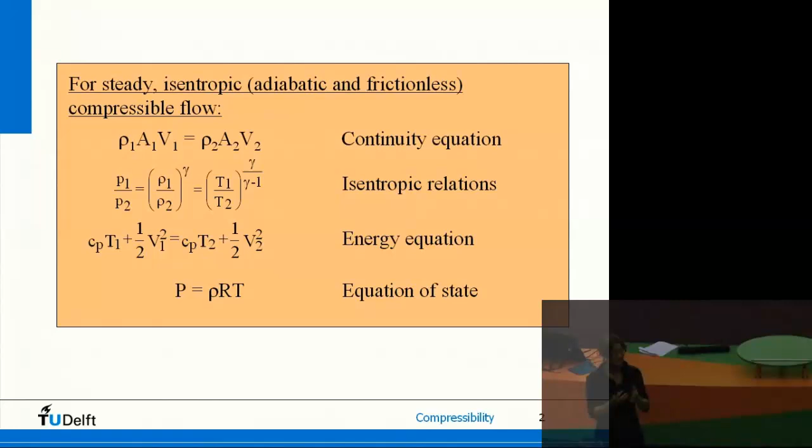If your flow is fast - supersonic, transonic - you have pressure and density changes such that the temperature does change in your flow, through P equals rho RT. It can expand very much, so density can drop a lot, and something will happen to the temperature as well. So bear in mind, isentropic flow means no heat is added or subtracted, but the temperature can still change. The other requirement is that it should be reversible, so dissipative effects can be neglected.

Then we derived these equations. We already had conservation of mass, the continuity equation. Then last time I derived the isentropic relations, which are strong relations relating the scalar quantities - pressure, density, and temperature ratios - to each other. Once you have knowledge about the state at point 1, and you know one other quantity at another location, point 2, you can derive the rest. These are the isentropic flow relations.

For isentropic flow, we could also derive the energy equation, starting from the first law of thermodynamics and using the Euler equation. This is the equivalent of Bernoulli. Velocities scale with enthalpy - velocity squared, changes in velocity squared, scale with Cp times T, and that is enthalpy. This is conserved throughout the streamline: Cp*T plus a half V squared is constant. That's energy conservation. We already had introduced, in the first lecture, the equation of state, P equals rho RT.

So we have here the unknowns P, rho, T, and V - four unknowns and four equations. So if you know, for example, the areas, you can solve for anything. And that's where we ended up.

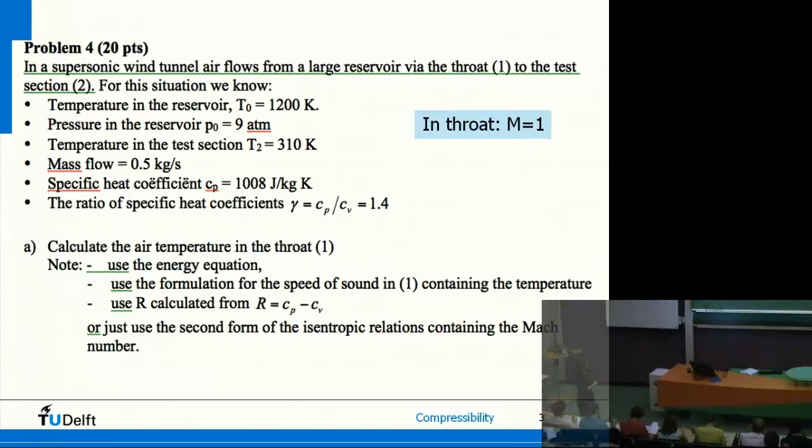This is a picture of the case: we have a very large reservoir up here, and flow is going out into the throat. I also got a question - how can the speed be 0 in this large reservoir? Well, you can assume it to be really huge, with the throat very small in comparison. In some bit of the reservoir, flow will flow out, but the very large bulk doesn't really notice, so you can approximately assume the speed to be 0 inside the large reservoir.

It goes through the throat, a converging nozzle, then diverging into a test section. Now if conditions are such that you get really supersonic flow - and it's called a supersonic wind tunnel if conditions are right - this depends among other things on the contraction ratio, but also on the pressure downstream. Please note the pressure in the reservoir was 9 atmospheres, so it's really pushed out.

If it's supersonic, then at the smallest cross-section, called the throat, the Mach number will be equal to 1. The Mach number is speed divided by the speed of sound, so here the flow will exactly have the speed of sound. That has to do with something we will explain next year in compressible aerodynamics.

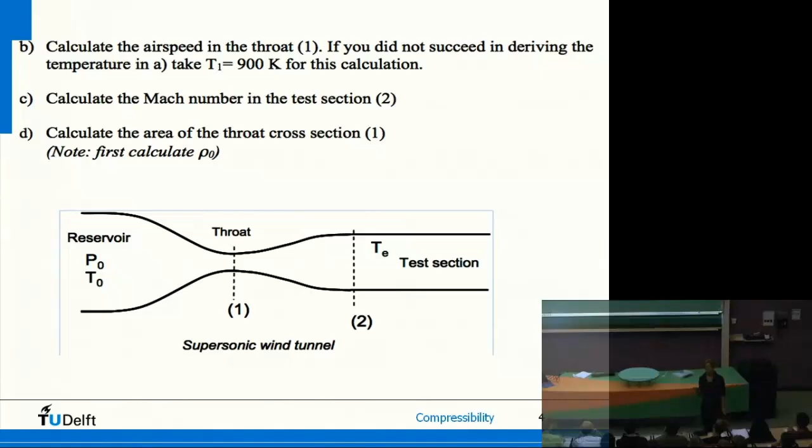If you are more used to partial differential equations, you can see that inside the PDE, that is sort of contained, a physical fact. So M is equal to 1 here. The speed of sound, square root of gamma RT, depends on temperature, so it can change throughout the flow. We always use 340 meters per second, but that's the speed of sound at standard sea level air conditions. In oil it is different, and if you give the air a speed, the speed of sound changes too. So please be aware that you always have to compute that.

Mach is 1 here, sonic flow. In a supersonic wind tunnel, if you increase the area, the flow speed will increase and you get supersonic flow at the test section. So we're halfway, I think. We just calculated the airspeed as well, and I think we're now at point C. So I will give the answers we derived last time.

So, the temperature in the test - in the throat, I think. What was the first question? Temperature in the throat. So for A, T star was 1000 Kelvin. For B, the speed in the throat, actually equal to the speed of sound in the throat by definition, was equal to 640 meters per second.

Now let's continue with question C. The question is, calculate the Mach number in the test section. Mach number, any ideas how we can? Yes, so step 1, what is the Mach number? Speed divided by the speed of sound. So Mach number in the test section is V test over A test. Now, was there any information that we can use?

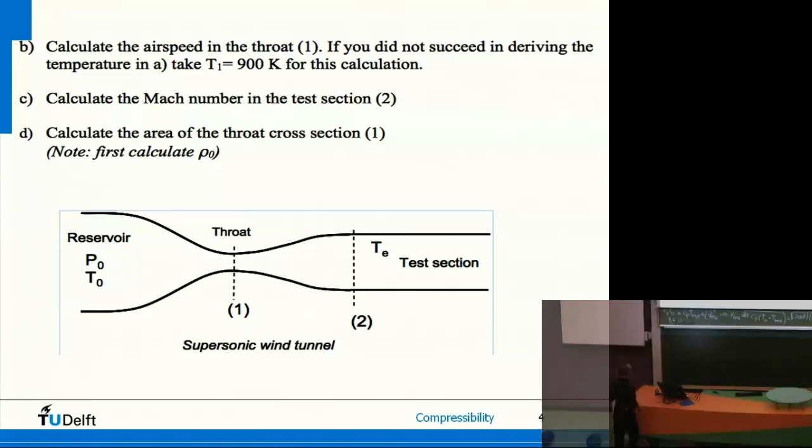The area of the throat of the cross section. Any ideas? Maybe I should... Rho AV, we can use that one. And what is it equal to? To rho AV, mass flow, perfect. So indeed, rho AV is constant. Good point, because this is the only equation we have the area in, so good starting point.

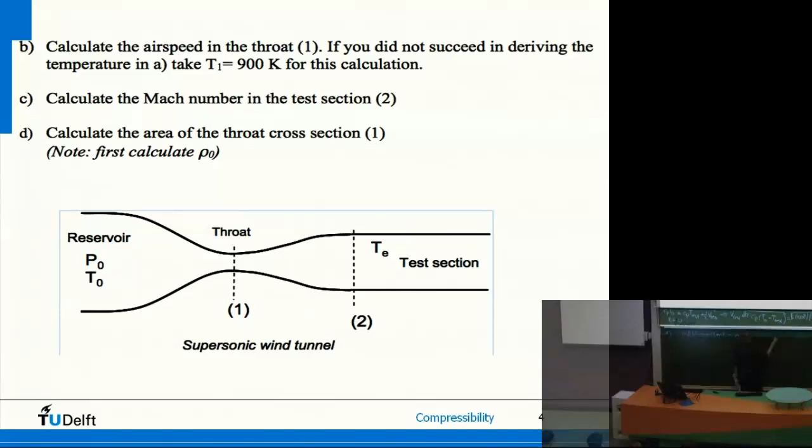So this is constant. And what is it equal to? It's equal to the mass flow. And you can check it, because if you're interested in what is it, so we have rho, kilograms per meters to the third, area, meters squared, v, speed, meters per second. So what is the dimension of this? It's kilograms per second. So how much kilograms of air go through this area per second? Right? So it's the mass flow.

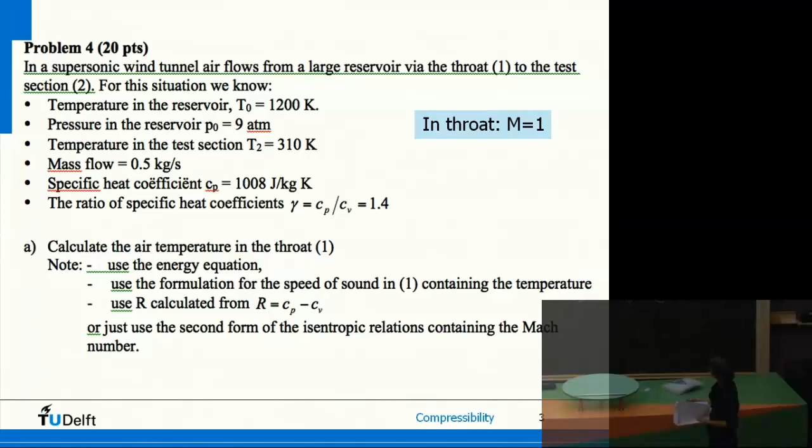Do we have information about the mass flow? Excellent, 0.5. So indeed, we can solve this question now, because we have 0.5. Where do we have 0.5? Everywhere, it's constant. Okay.

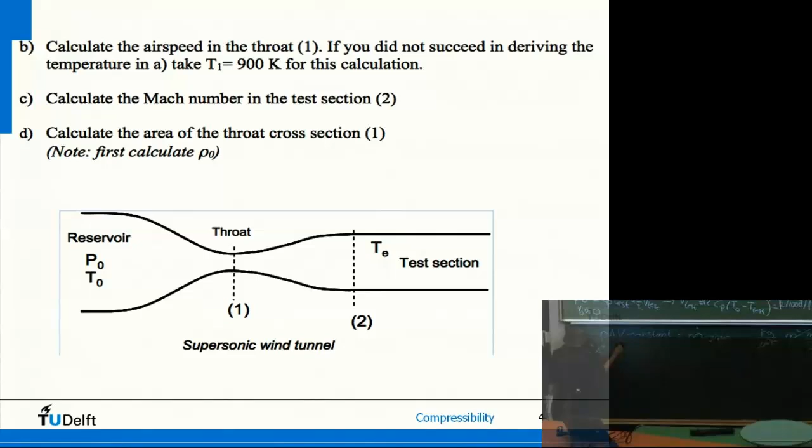Area of the throat in the cross-section. Well, then, of course, this one is given. Speed is 0. Whoa, wait a minute. So we have to apply this in the throat, right? To find the area of the throat. Then somebody said speed is 0. Wait a minute, I'll get back to that.

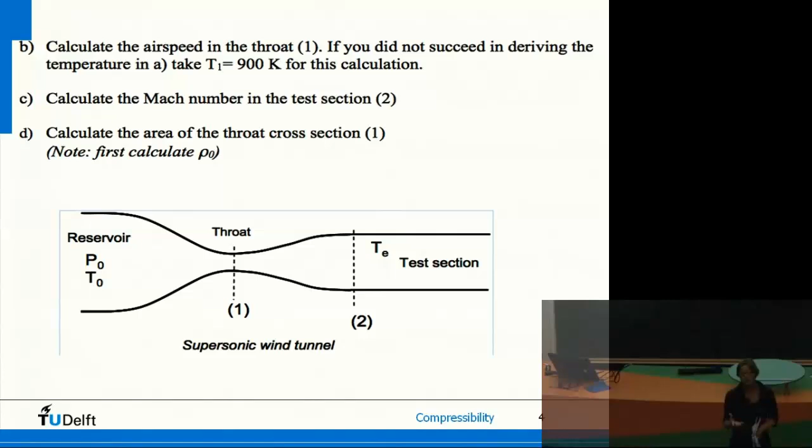So yes, you might get the idea that the speed is 0, because of course in the reservoir the speed is 0. We just assumed. So if you apply it there, we have no mass flow. What is happening there? Well, we have an infinite area in a way. So infinite times 0, what is it? It depends a bit on how it goes to 0. So that is not something that brings you much further.

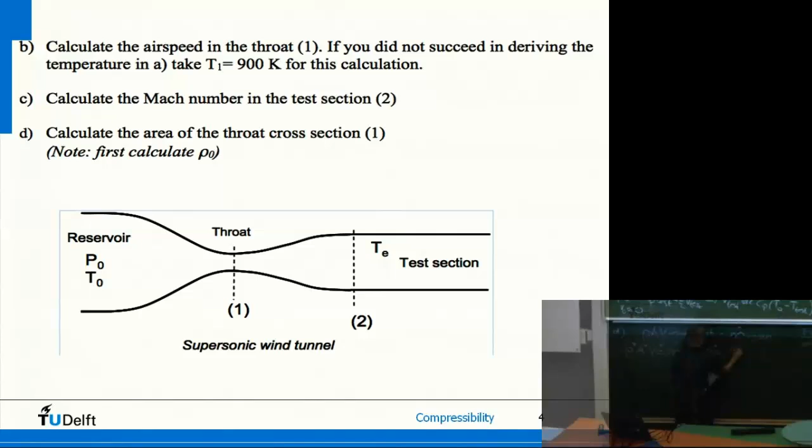So mass flow equals rho star, A star, V star. We're looking for A star, so that's going to be the area of the throat. It is then mass flow divided by density in the throat times speed in the throat. Do we have the density in the throat, and do we have the speed in the throat? Speed, yes, right? I think we computed it here.

So that one we have from B. So V star, from part B, V star was 640 meters per second. So if there's any way to compute rho star, we're done.

Isentropic relations, perfect. Because isentropic relations relate ratios of something to ratios. So what would you apply it to? So of course on one side density, right? So the isentropic relations for density, rho 1 over rho 2 is equal to, and what would we choose? Which form, pressures or temperatures? Temperatures, perfect, because we have more information on temperatures actually. So T1 over T2 to the power 1 over gamma minus 1.

Now we have to choose point 1 and point 2. So where are we going to take it from? So this is the general form of the isentropic flow relations. We're looking for something in the throat, so it probably makes sense to choose one of them in the throat, right? So let's do this one in the throat. And the other one? 0, yes, reservoir.

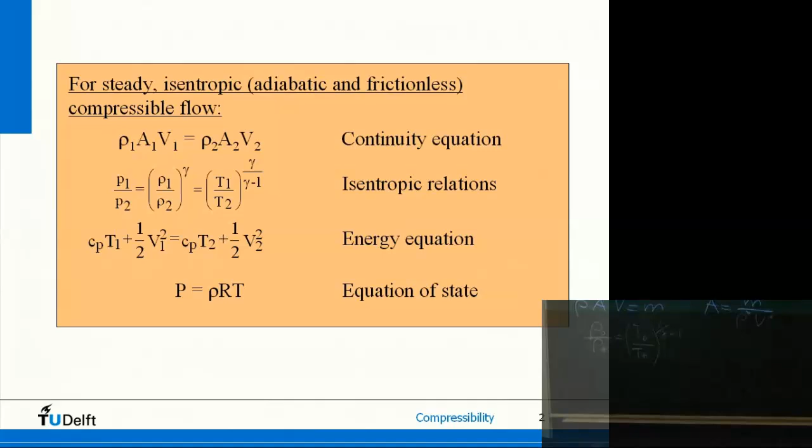Why do we choose the other one in the reservoir? No, this is fine, the gamma is with the pressures. Sorry, rho, I made a step. So rho over rho 2 to the power gamma. So the isentropic relations, rho 1 over rho 2 to the power gamma is equal to T1 over T2 to the power gamma over gamma minus 1. What I did is I took the gamma square root of this. If I had taken the pressure, of course it's true, but I'm looking for density versus temperature. Okay, why reservoir?

We have also temperatures in the throat, right? We need pressure, because for rho 0, it's not enough to have temperatures. We use the equation of state, and we need pressure, and that's the only location where we know the pressure. Indeed, so rho 0 from the equation of state, so P0 over R T0.

So let's do that first. Then rho 0 is equal to the pressure, 9 atmosphere, so 9 times 1.01 times 10 to the power 5, divided by R, 288, times temperature in the reservoir, 1200. So then we find the density in the reservoir to be 2.64 kilograms per meters to the third.

So we know this one, rho 0, we know that one, and we know that one. Okay, so now it's just working our way through the equation. So this means that rho star is equal to rho 0 divided by T0 over T star to the power 1 over gamma minus 1.

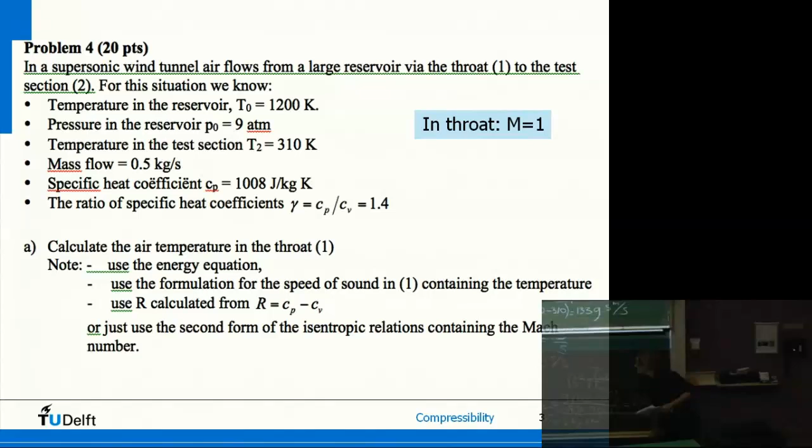Yeah, is this clear? Any questions about this? Maybe for some people. Okay, then we continue with the rest of the lecture.

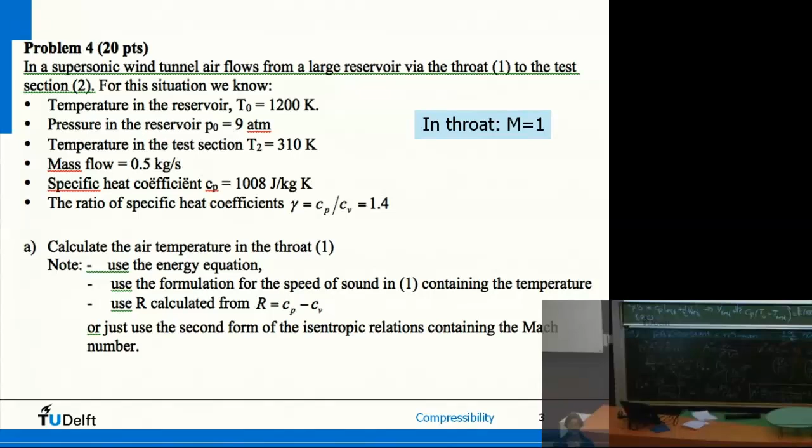Okay, compressible flows. A little bit more of compressible flows, and what we're then going to do is look at measurement of flows, because that is quite important in our wind tunnels, of course, but also when you're in your aircraft, you would like to know the speed of your aircraft, and we do that in a certain way. So the rest of the lecture will be on, first, a bit more compressible flows. I'll derive the second form of isentropic relations, but also how to measure flows.

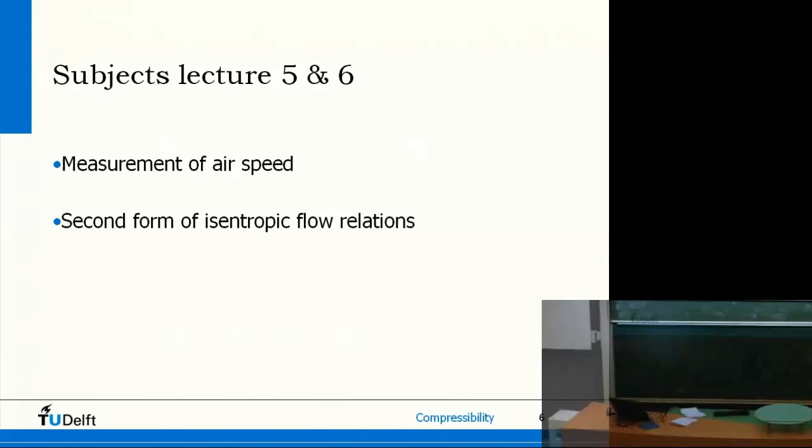So measurement of airspeed and the second form of isentropic flow relations. Of course, compressible flows, unfortunately it's not flying anymore, but it's relevant for supersonic flows, supersonic aircraft like the Concorde.

Just summarizing from last time, also please don't forget about the speed of sound. That's the speed at which sound waves travel. A squared is dp over d rho. And from using the Euler equations and the conservation of mass, we could derive that that is the same as A is square root of gamma P over rho. Using the equation of state, we found A is square root of gamma RT.

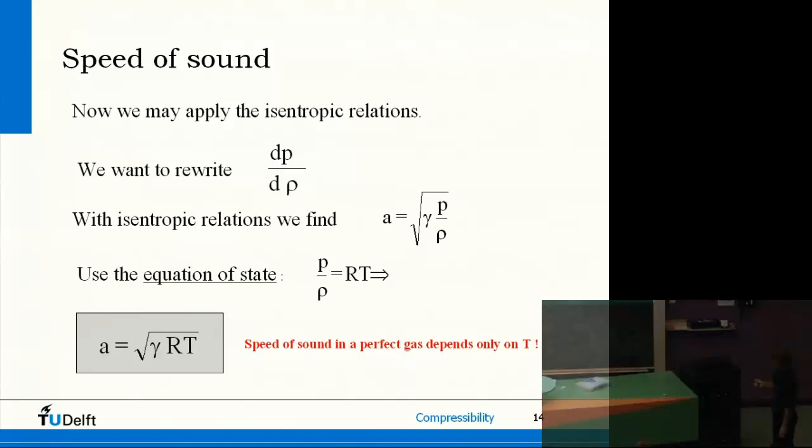So the speed of sound, which travels through a medium, is only related to the temperature. And that's due to the fact that the temperature is actually the kinetic energy of the molecules, and sound is transmitted through molecules throughout the medium. And this is, of course, only in a perfect gas, because we use the equation of state in a perfect gas. Then the Mach number, V over A, we already worked with it.

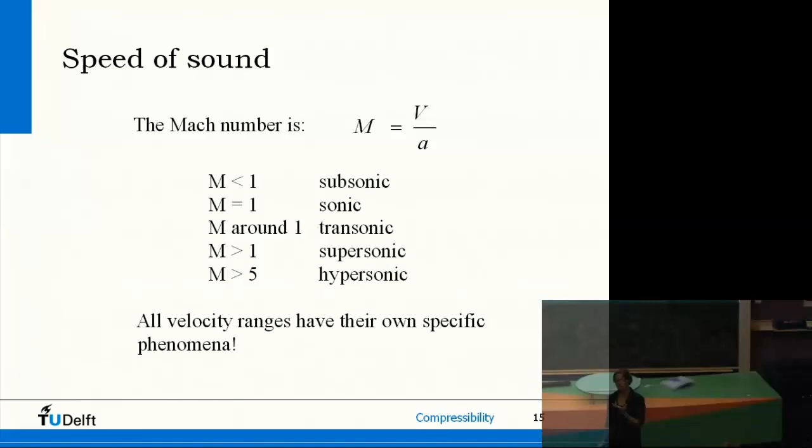Speed over speed of sound. If Mach number is smaller than 1, then the speed is smaller than the speed of sound, and we call the flow subsonic. We also have the name for low speed subsonic, where the speed is so low that you can assume incompressible flow, so the speed is then below 100 meters per second. But of course we have also high speed subsonic, so subsonic flows above 100 meters per second. And this 100 meters per second is approximately Mach 0.3. So low speed subsonic incompressible flow assumption is about when Mach is below 0.3.

But when Mach is between 0.3 and 1, you do have relevant density changes already, but the flow speed is still below the speed of sound, subsonic. Then Mach is 1, they're exactly equal, sonic, what you have inside the throat of a supersonic nozzle, a wind tunnel, or also can be a rocket engine. If it's around one, we also have a certain name for that, it's called transonic. So in some parts of the flow it's below 1, in some parts of the flow it's above 1, but it's actually around 1. And that is what most commercial airliners are flying at.

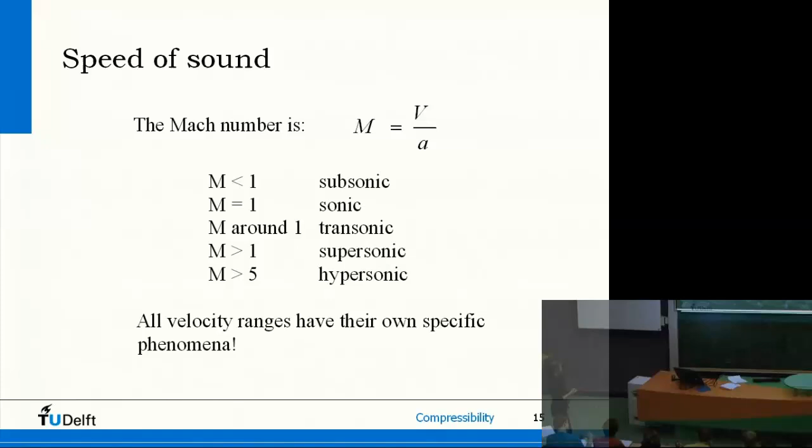So transonic flow: if you have an aircraft at cruise speed, you typically have a speed of about 0.7, 0.8, and then the flow will increase over the wing, and you will have locally supersonic flows on certain portions of the wing. So that's transonic. Then, of course, if the Mach number is larger than 1, your flow speed is larger than the speed of sound, and we call it supersonic flow.

And for really much, much faster than the speed of sound, we call it hypersonic. Our hypersonic wind tunnel actually goes up to Mach 11, and that's quite relevant for spacecraft, not so much aircraft. So this is the range, and of course you can have portions.

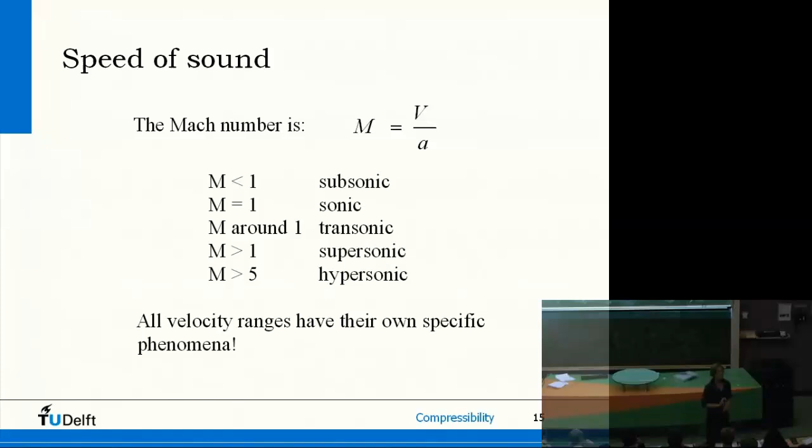In transonic flow you have portions of subsonic flow and portions of supersonic flow. If flow is speeded up, it goes typically isentropically, so it expands without any shocks. You can go from subsonic to transonic, to sonic, to supersonic. But if your flow then has to decelerate again from supersonic to subsonic, the way that works is with a shock. A shock is a very discontinuous, sharp location where all your properties jump - temperature, pressure, velocity - and that is not an isentropic effect. So you can only apply the isentropic relations up to a shock, but not over a shock. Over a shock, your total pressure and everything changes.

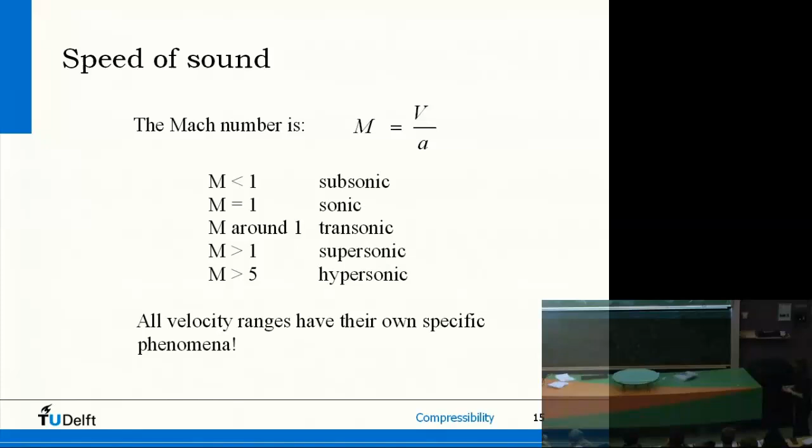Okay, now let's go back to the low speed range, the subsonic low speed, and look at how we can actually determine airspeeds, because that's what we're often very interested in - speeds of aircraft, airspeeds in our wind tunnel. So how do we go about that?

So suppose again a wind tunnel, but now a subsonic nozzle. We have a converging-diverging nozzle again, a test section here, certain conditions upstream, certain conditions downstream, and certain total conditions in a reservoir way up here. What is then the value of this airspeed here in the wind tunnel section?

So I have an example with that - example 4.20. In a low-speed wind tunnel, we put a manometer, a mercury manometer, and we connect it to the settling chamber, the reservoir, and on the other side we connect it to the test section. The contraction ratio of the nozzle is given as 1/15, that's the area ratio. The reservoir pressure and temperature are given, and the height difference of mercury is given, where one side was connected to the settling chamber and the other side was connected to the test section. Density of the mercury is given. So the question: calculate the velocity in the test section.

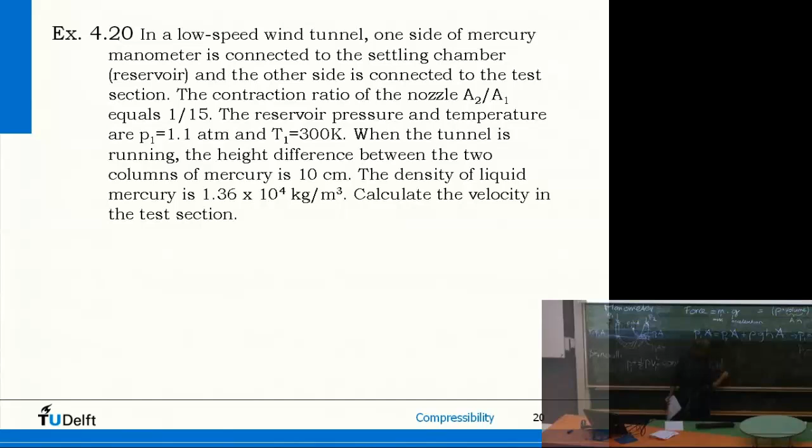Because the mercury gives us the height difference and the density, we say P1 plus half rho V1 squared is equal to P2 plus a half rho V2 squared. We're looking for the velocity in the test section, so V2.

So we can rework this. A half rho V2 squared is actually equal to P1 minus P2 plus a half rho V1 squared. Now, so we're looking for V2. We need the density of the air.

Do we have any idea on the density? Does it say anywhere sea level? That's the easiest way out - do we have sea level conditions somewhere? No, eh? It's not saying we have sea level conditions, so no standard sea level conditions.

So how can we then get to the density? Where do we have the pressure? Pressure difference? Equation of state, perfectly. If you think about the isentropic flow relations, P over P and T over T, that's really for compressible flow, where you have significant temperature changes. In incompressible flow, you typically don't have them, so the one I used before for the supersonic wind tunnel won't get you anywhere. But the equation of state, P equals rho RT, works.

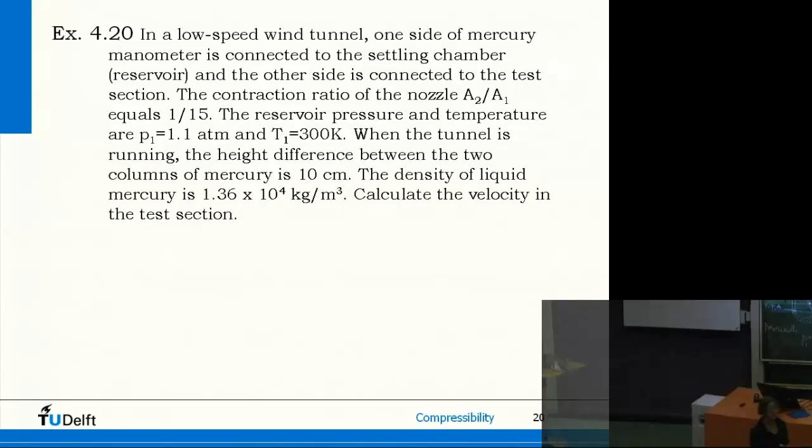So if we know pressure and temperature somewhere, we can find the density. Do we have somewhere pressure and temperature? The reservoir, or settling chamber as it's called here. So rho from the equation of state, using the settling chamber conditions.

Okay, so rho we know. P1, PT, P2 we know through the manometer. So then we still have one equation with two unknowns, V1 and V2. And it's a bit misleading maybe - low-speed subsonic wind tunnels are much different from supersonic wind tunnels.

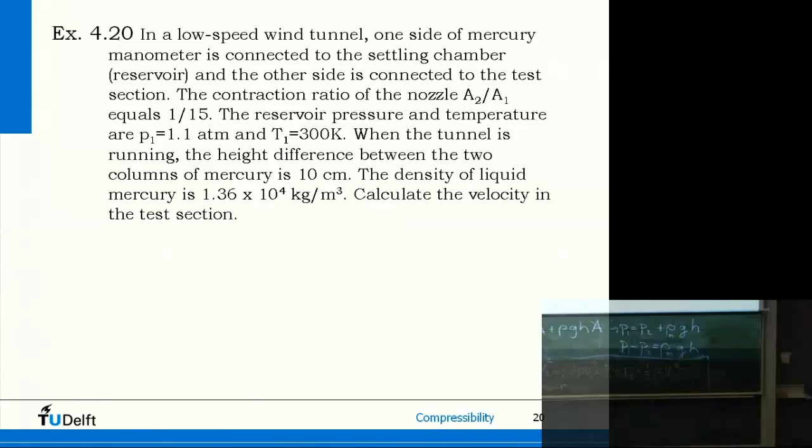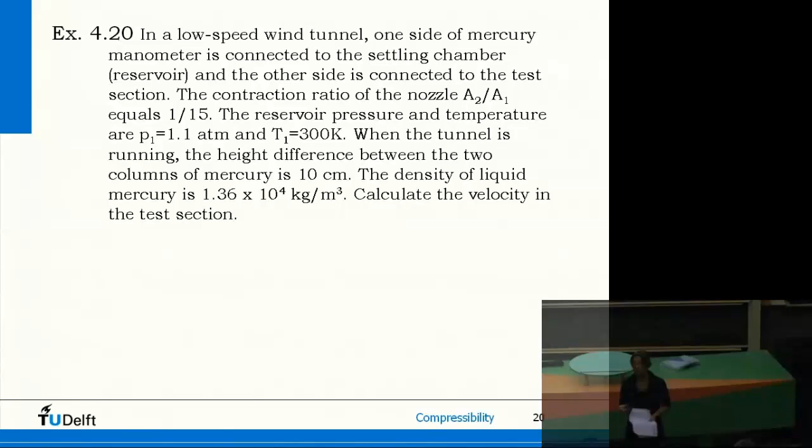Supersonic wind tunnels work with a huge reservoir under very high pressure, and the flow is really injected through a very strongly converging-diverging nozzle. That's typically not how subsonic wind tunnels work. Usually we have a fan pumping air around through a converging-diverging nozzle, much less strongly contracting, and we don't typically have a large reservoir. It's really flowing through - this is really how it works.

So really we have here a cross-section and here a cross-section, with a certain pressure here and a certain pressure there. What you'll see, though we haven't computed it yet, is that this pressure difference is not on the order of 9 atmospheres - it's much smaller in incompressible flow, with small pressure differences scaling with velocity differences.

So we still have a V1 and a V2 - we're looking for V2 here, but we have two unknowns, so we need more information. Question: what didn't we use? Yes, V1A1, mass conservation. If you're stuck, read the question again - is there something given I didn't use? Yes, the contraction ratio.

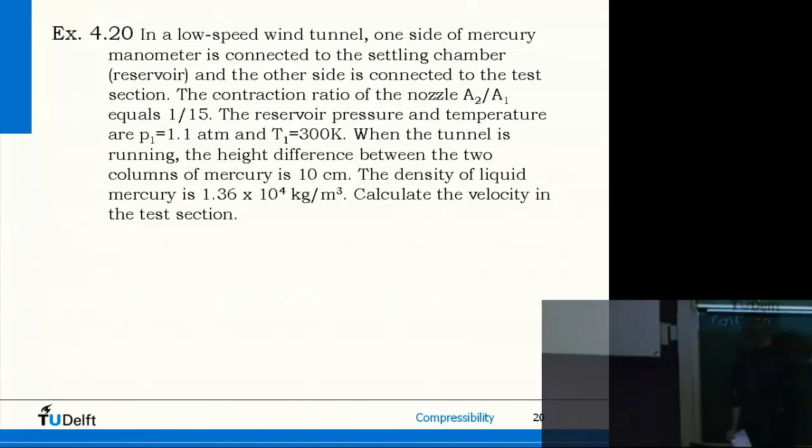So conservation of mass, the continuity equation. We have incompressible flow, so V1A1 equals V2A2. We can substitute this into the equation. We're looking for V2, so we can substitute V1 as V2A2 over A1, and substitute that into this equation.

And then we have it. So the steps we went through: the manometer gives us the pressure difference. Bernoulli relates the pressure difference to speed squared. Density comes from location 1. Because we have pressures and temperatures there, we use the equation of state. And then finally we use the continuity equation: V1 A1 equals V2 A2.

Okay, let's quickly do it, it's not so interesting anymore. We have half rho V2 squared equals P1 minus P2 plus half rho V1 squared, so that equals A2 over A1 squared times V2 squared. Then we collect all the V2 terms on one side, so we get half rho minus half rho times A2 over A1 squared, times V2 squared, equals the pressure difference P1 minus P2.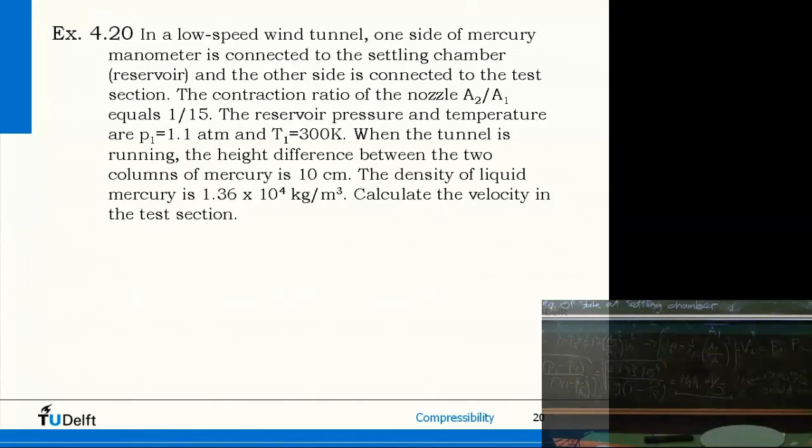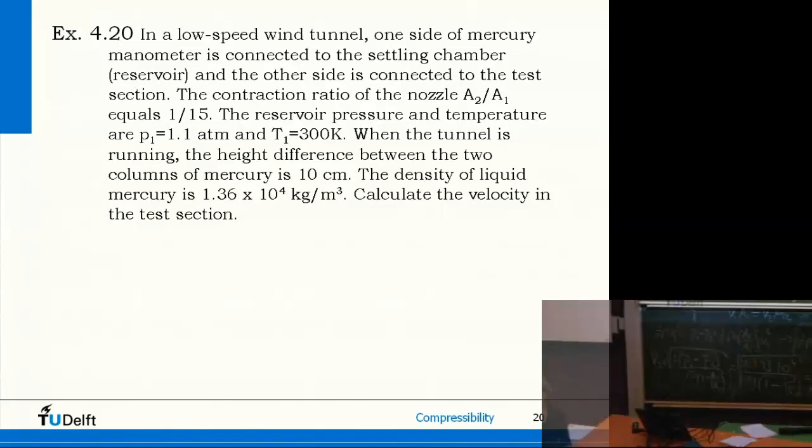Later we'll look into the differences. It's not a very discrete difference - from the second form of the isentropic flow relations I'm going to derive later, you'll see it's not a strong difference, it might change by 7 or 8%. But I'll cover that afterward. One question? Yes, I'll lift the blackboard up. Have a good break and see you after.

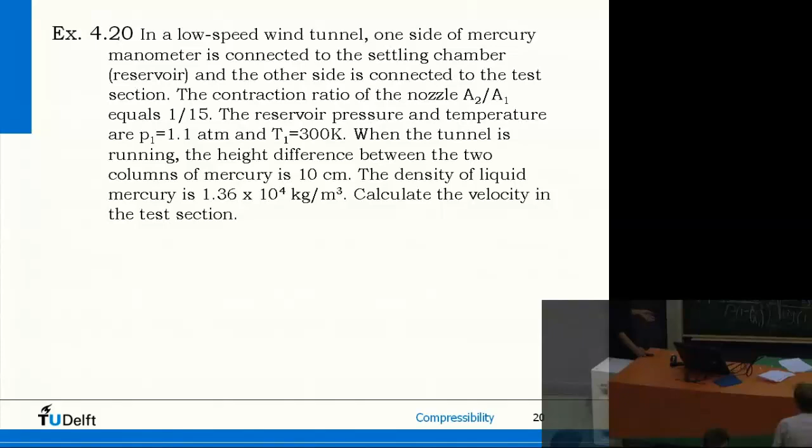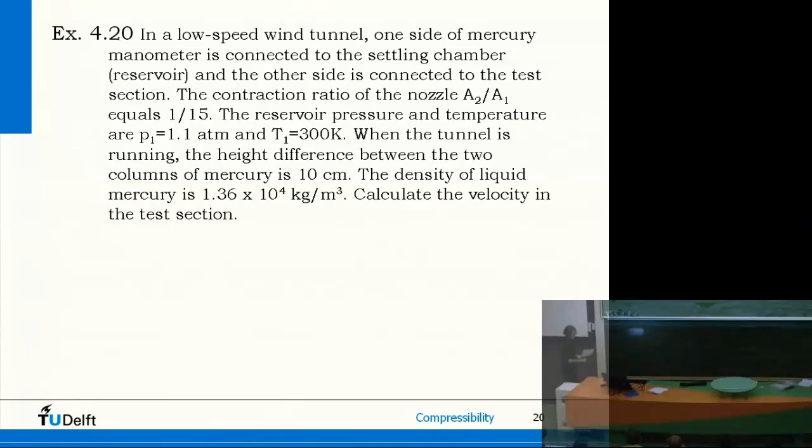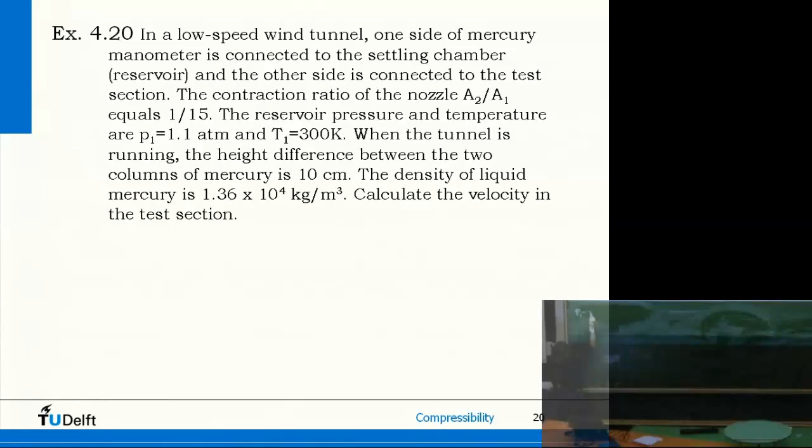I put the manometer on, right, and it's P1 minus P2 with a height. How did I know which one was the low pressure and which one was the high pressure? I think I said P1 minus P2 - or did I say P2 minus P1? P1 minus P2. So here was rho g h. Could I have said P2 minus P1? No, because you have to realize which one is the high pressure and which one is the low pressure.

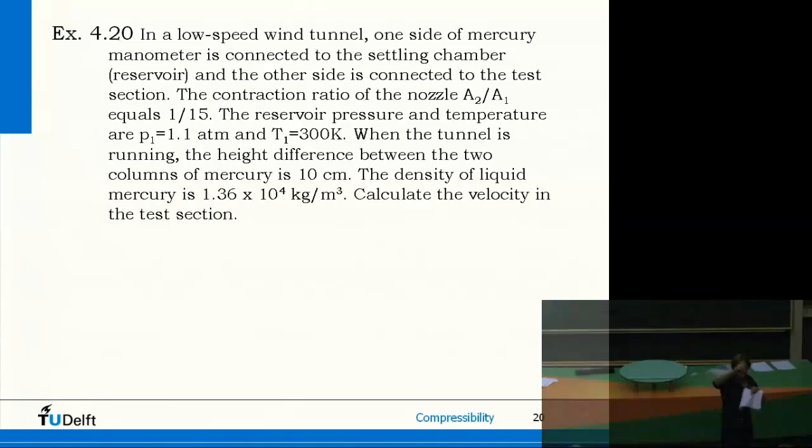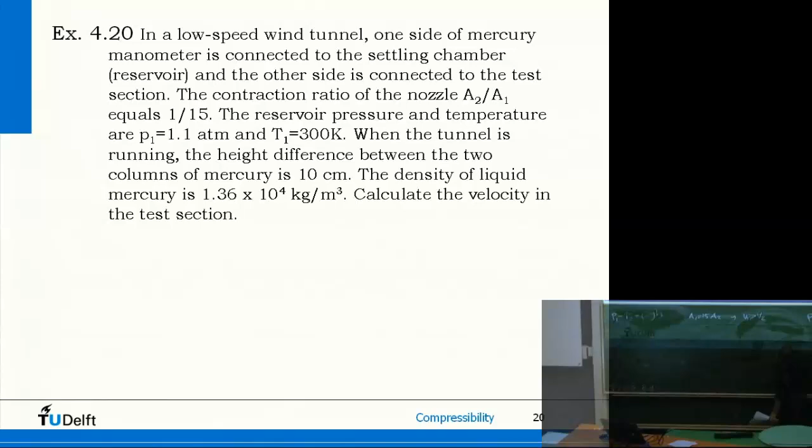The one with incompressible flow, the one with the largest area, right? So I use this: A2 over A1 is 1 over 15, so area 1 is 15 times larger than area 2. So area 1 is the large area, area 2 is the small area. So area 1, large area, low speed, and with incompressible flow, as we decrease the area, the speed increases, right? So area 1, large area - what I use is A1 is 15 times A2, so V1 is smaller than V2. Then in Bernoulli, P1 plus half rho V1 squared equals P2 plus half rho V2 squared. So if V2 is much larger than V1, P2 is much smaller than P1, right? So I drew this one, right? P1, P2.

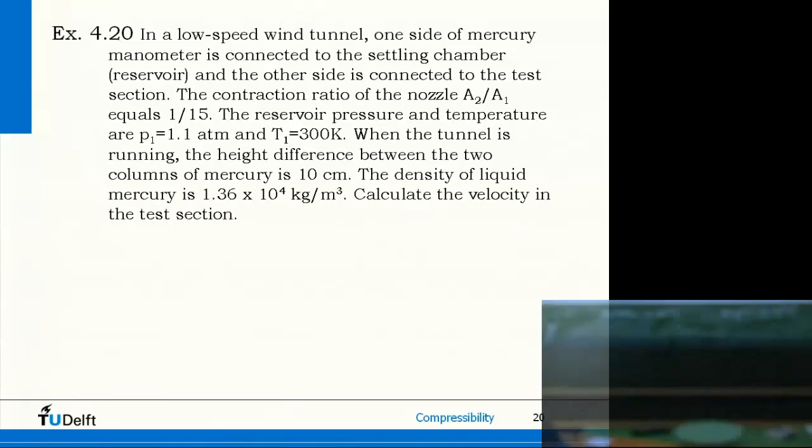So which one is the high pressure? P1 is the high pressure in this case, and P2 the low pressure. No, sorry, that's wrong, I'm confusing you. Well, whatever, but please be aware that you do the P1 and P2 correctly.

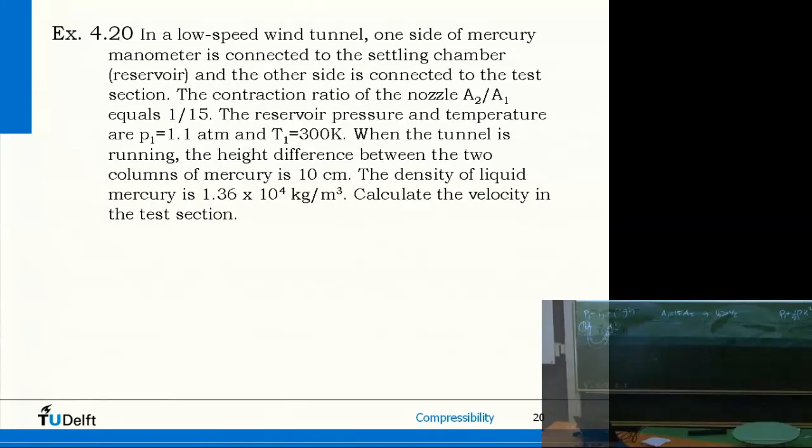What you could also have done with the pressures is substitute them: compute P1 and P2 separately and substitute them in the Bernoulli equation. Sorry, that's more confusing. Okay, then speeds.

But at least you should be aware which one has a higher speed and which has a higher pressure and a lower pressure. Speeds - of course, the notation is a bit confusing. I introduced speed as a vector with a direction, right?

Here I always do a one-dimensional balance, so my speeds, my velocities here have just one direction, typically horizontal. I don't assume changes throughout my cross-section, so I have a cross-section and assume unidirectional, uniform flow. Viscous effects are not important, and that is my speed. So it's not really a vector because I use scalars on the other side - it's only the x direction.

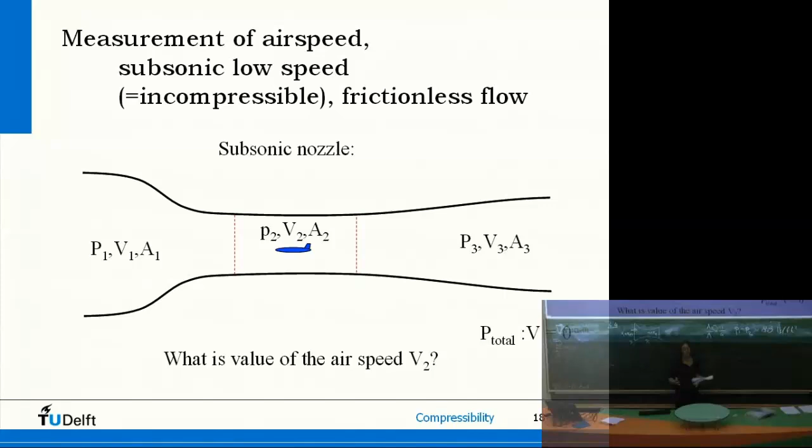Then I gave you homework which you can now maybe solve. Given this example, homework 4.4, please have a look at it. It was also a converging diverging nozzle with V in and a pressure, and a contraction ratio given there, and P1 minus P2 given here. It's in Anglo-Saxon units - you can transform it to SI units if you want, but it's more about the way you think. So I don't mind what the answer is, but think about whether you can solve this. The question is to find V2, given only this. Some people were not able to solve it, but you can solve it a similar way as this example. Please try that at home.

Then we go to equivalent airspeed, and I'll introduce that to you based on another example. How is airspeed usually measured on an aircraft? Using pitot tubes and pitot static tubes. Here we have some information: an altimeter says the aircraft is flying at 1500 meters, we have an outside temperature of 277 Kelvin. If a pitot tube mounted on the wingtip measures a certain pressure, what is the true velocity of the airspeed and what is the equivalent velocity of the airspeed? Now I'll introduce those concepts to you.

So first the pitot tube - that's a way to measure. We had the manometer measuring pressure differences; the pitot tube also measures pressures. The pitot tube is like this: you have the flow, this is actually a very small tube. Flow flows into the tube and here you have a pressure gauge, sort of reservoir, where the speed is collected. So the speed goes in, and then the tube fills itself with air.

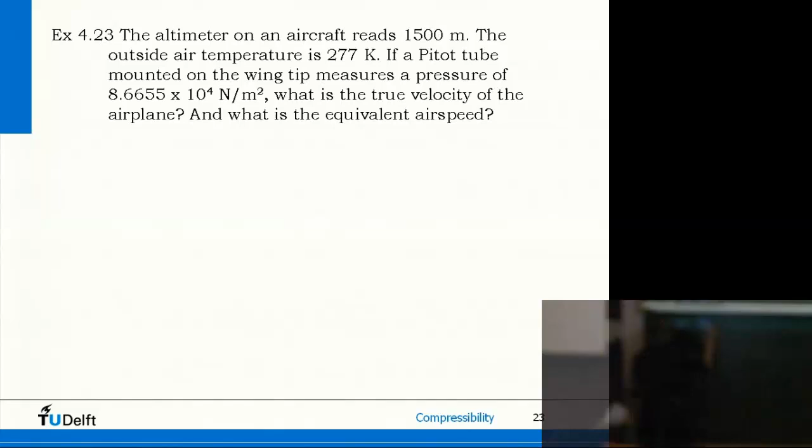P plus half rho V squared is constant along a streamline. That would bring us somewhere because we have some information on pressures, right? We have the pressure measured by the pitot tube, so we have one pressure. Do we have another pressure?

Yes, standard atmosphere. 1500 meter altimeter, standard atmosphere, but not the standard atmosphere at sea level, of course, but at 1500 meters. So we have P0 from the pitot tube, and we have a pressure from the standard atmospheric table, Appendix A, 1500 meters.

Okay, so we apply Bernoulli. So we have P0 plus a half rho V0 squared, and V0 is 0, is P plus a half rho V squared. V we're looking for, P we can find from the table. And this table gives you that P is 8.4559 times 10 to the power 4 newtons per meter squared.

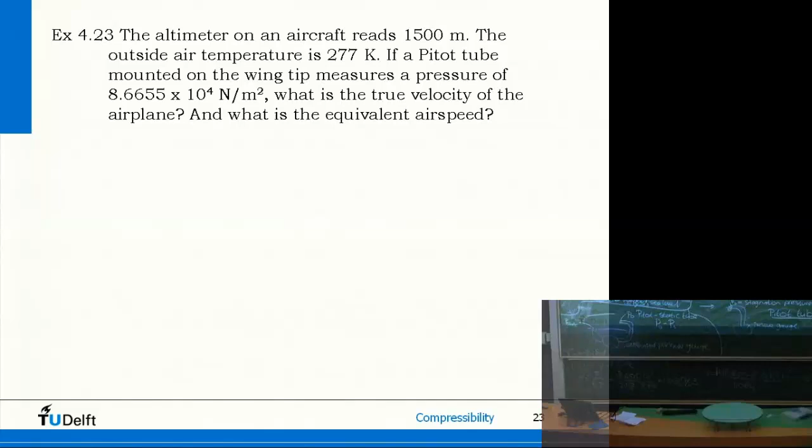So how much difference? We just computed 62.8, and 58.5, so about 93% of the actual value. So we're off about 10%. So that's equivalent airspeed. Questions?

No, then we can continue with our compressible flow stuff. Yes, question, sorry, why do we actually use equivalent airspeed?

I mean... yeah, because it's an Anderson book and it is a good concept. I don't think you use it that much. The question was, why do you use equivalent airspeed? Well, it's hard to measure densities, but you can derive densities from temperature. So if you have an actual temperature measurement, it's not a problem like this. But sometimes people don't have that, and then they use it as an approximation. But especially close to stall, I wouldn't recommend it.

Okay. Yes, isentropic flow relations. So bear with me for the last quarter of an hour.

Okay, so what are we going to do?

We're going to derive, we have the compressible flow equations. We have the energy equation relating temperatures and speeds, isentropic flow relations relating density ratios to pressure ratios and temperature ratios. But sometimes it's easier to work with things like the Mach number. So you can recombine these equations into a different form. They're not more information, just in a different form, which might be handy if you have information about Mach numbers.

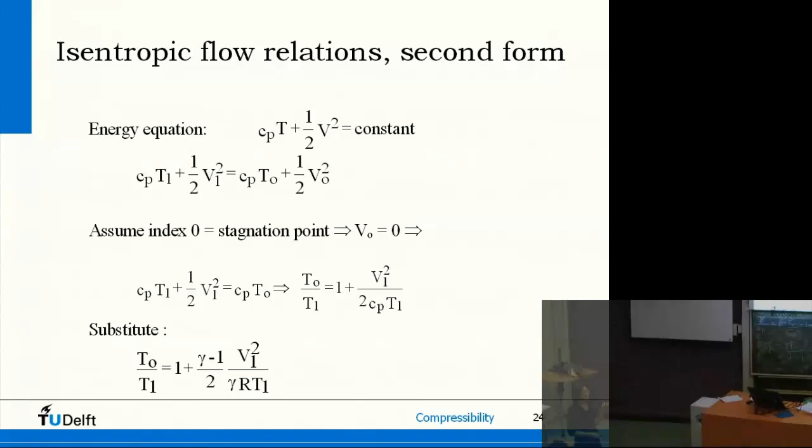So then we have these and these from the isentropic flow relations. I think I have a summary slide. Yes, it's the same. It's gray, so it means that you really have to remember it. On the exam, we might ask you to derive these from the energy equation and the isentropic flow relations. The only a bit tedious step, it's actually quite straightforward I think. The only tedious step is the specific constants reworking I did on the blackboard. But if you remember that you have to start from H is E plus PV, and work your way to find a relation for Cp as a function of R, you should be fine. Should be, if you practice lots.

Okay, I hope we have time for one practice. No? Oh, sorry. Okay, now what am I going to do first?

So I told you, you had to believe me, that we can assume incompressible flow for low speeds. You believe me? Good, I've been convincing. You can check now, right? Here you have a relation of how much the density changes with respect to total conditions as a function of the Mach number, and it goes squared - so you can imagine, squared, that is a parabola, right? Close to 0 it will not change that much. I will have the plot on the next slide. Close to 0 it will not change much, but further away, for higher Mach numbers not close to 0, you have a stronger density change, right?

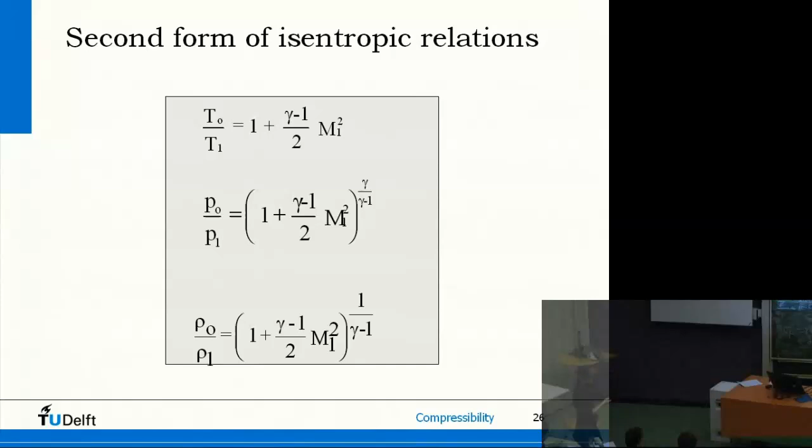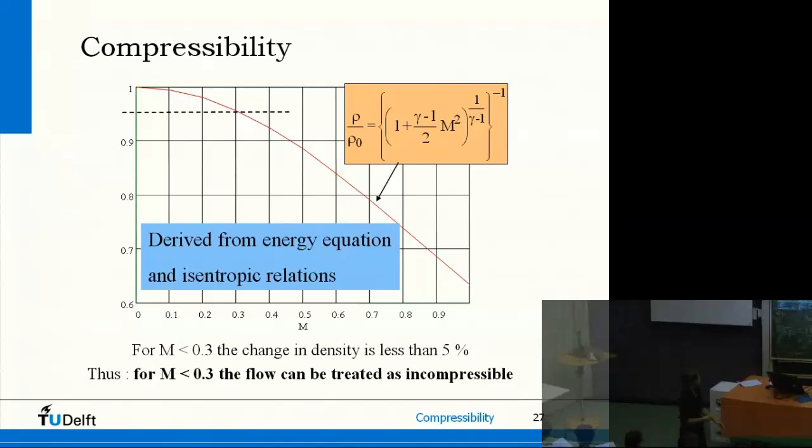Yeah? I will not make that. No. Okay, well I think I'll finish and then next time I'll start with 435. Any questions? Yeah. Okay.